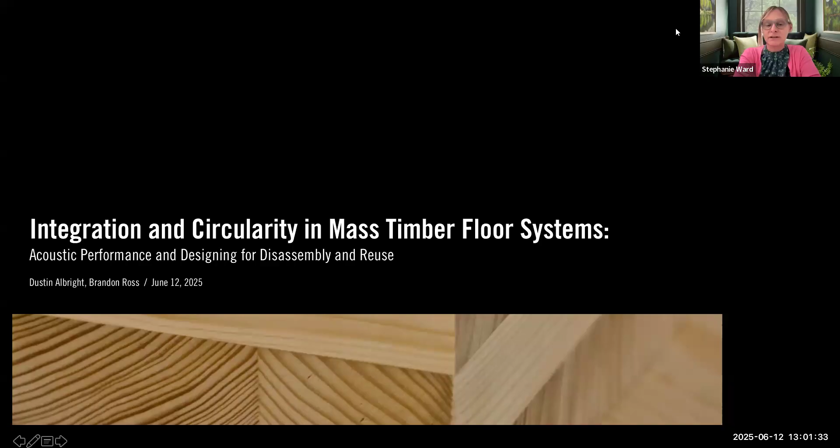Hi everyone, my name is Dustin Albright. It's great to be part of this webinar series. I too am a procrastinator, so I resonate with this group. I'm joined today by my colleague Brandon Ross, and we're going to talk about mass timber, floor systems, and acoustics.

For those I maybe haven't met, I'm a practicing architect here in South Carolina. I work in the Clemson office of Hanbury, and I'm also full-time an associate professor in the School of Architecture at Clemson. Brandon, my colleague, is a professor in the Department of Civil Engineering here at Clemson. Anything else you want to say by way of introduction, Brandon?

Sometimes I look a little more stylish so I can pretend I'm an architect. There you go, perfect, there you go.

Together we are part of the Wood Utilization and Design Institute at Clemson. This is a cross-disciplinary group of people that collaborate on research and teaching. You see several participants and contributors from forestry, civil engineering, architecture, environmental engineering, and chemistry. It's a great team and a highly collaborative setting, so really rewarding to be part of this group. The project we're going to share has been connected to the Wood Institute since we were awarded the project from the Department of Energy.

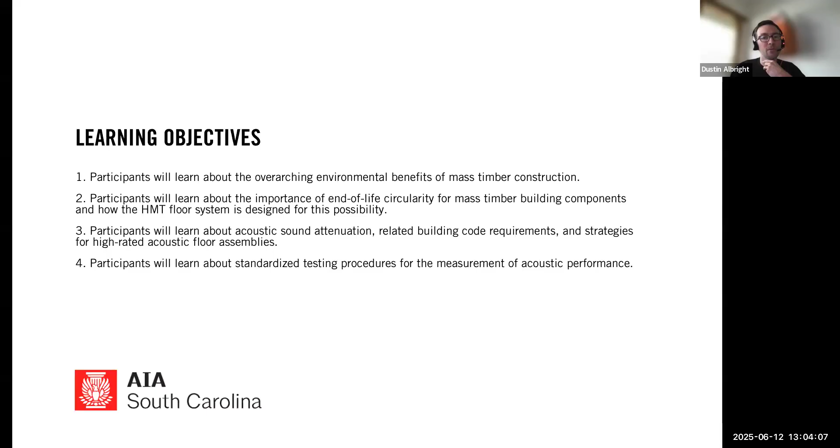Brandon, I'm going to turn it over to you to describe an overview of the project for the next few slides, and you let me know when you want me to advance the slide. Sure. We took an existing idea and formed a team, as Dustin mentioned. We have myself, a structural engineer, a couple of my civil engineering colleagues, Dustin, an architect, and we also have Dr. Pat Layton, a forester on the team, as well as an environmental engineer to do some of the LCA.

I always get this question: why is the Department of Energy interested in funding the development of a wood floor system? Mostly I get that question from other people who do work with the Department of Energy.

One of the missions of Department of Energy is to reduce atmospheric carbon, and that's where this program was birthed. It's Department of Energy, then ARPA-E, and under that is HESTIA. That's a program with projects that last about three years, about $45 million total, not just for Clemson but spread across many projects. The idea is, rather than building materials that require carbon to go into the atmosphere, let's turn that on its head and invest in research in building materials that sequester carbon. There's a really old technology that does that very well called trees, and that's where our project came along. There are other folks looking at insulation or negative carbon cements they're even trying. Lots of different things there.

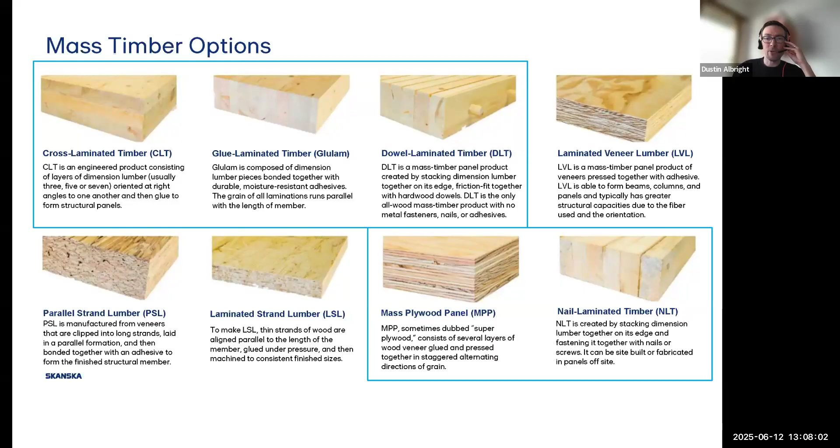In terms of the panelized products, the ones in the blue boxes here are the ones most typically used and available in North America. That's cross-laminated timber, CLT, and glulam, which can be panelized, though glulam is often used for beams, girders, and columns as linear framing members too. There's also dowel laminated timber, nail laminated timber in the bottom right, and mass plywood, which is plywood sheets laminated together. One product not represented here, new on the scene, is veneer laminated timber, VLT, produced by a company called Boise Cascade.

Some of the motivating factors and advantages of working with mass timber: on one hand, there's robust and resilient construction with a renewable natural resource, wood. Mass timber construction supports state and regional forest economies. It affords a very low carbon footprint compared to steel and especially concrete, and there's also the opportunity for carbon storage, which we'll talk about in a moment.

There's rapid construction with precise prefabricated elements, as with other prefabricated systems, and a high strength to weight ratio - wood is really strong with respect to its own weight. The net result is lighter weight buildings that can result in lighter foundation systems. The ability to expose the structure as a finished material is really appealing and can cut out the need for other finishes, like ceiling finishes, saving on construction costs and time.

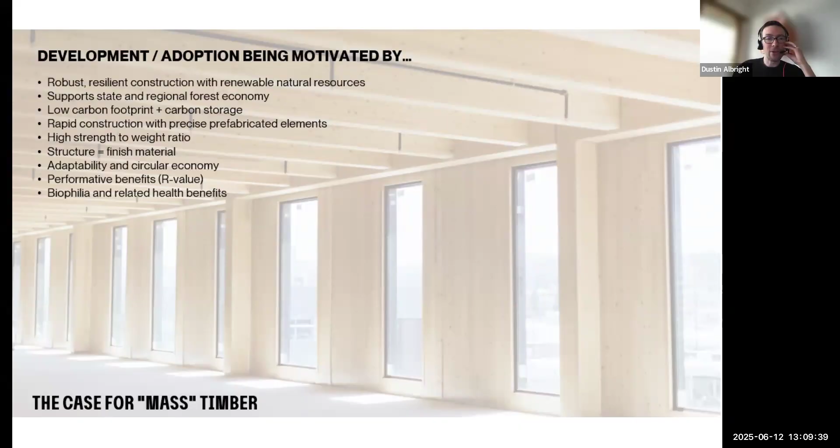Adaptability and circularity of the components is something we're going to talk a lot about. There are also performative benefits: the inherent R value with timber, biophilia, and other health-related benefits. I don't have time to get into that, but there's a lot of research out there on it.

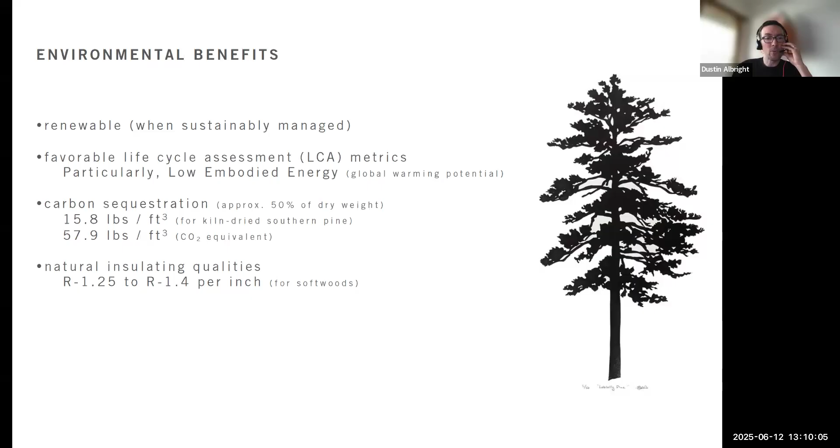Let's talk about the environmental benefits briefly. These include the renewability of timber when sustainably managed, favorable life cycle assessment metrics - in particular low embodied energy - the fact that wood sequesters carbon, which we'll talk about in a moment, and its natural insulating quality: an R value somewhere between 1.25 and 1.4 per inch just for softwoods, before you even add other insulating materials.

Wood as a commodity, as a resource, is renewable, provided it is sustainably managed through best practices and sustainable forest management. There are various organizations and agencies you're probably aware of, like the Forest Stewardship Council, SFI, and others that certify the sustainable management of forests and forest lands.

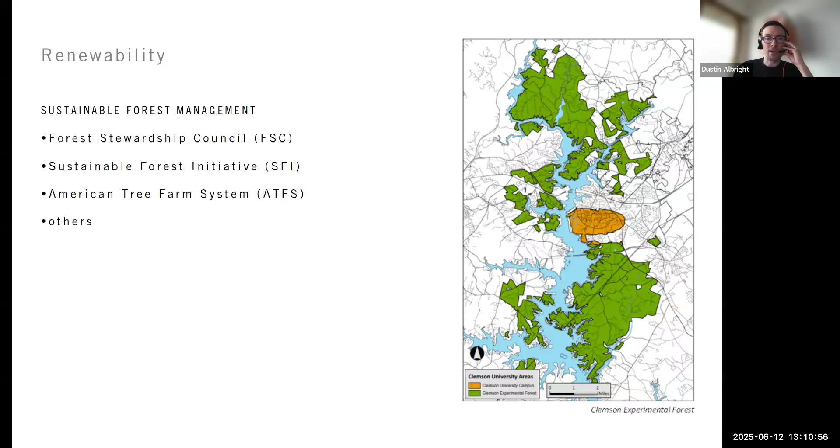Something you may not know: pictured here in orange in the middle of this graphic is Clemson University's campus. But in green, to the north and south of the campus, is 17,500 acres that Clemson University owns and maintains as forest land - we call it the Experimental Forest, Clemson Experimental Forest. All of that property is certified through the SFI Sustainable Forest Initiative system as sustainably managed.

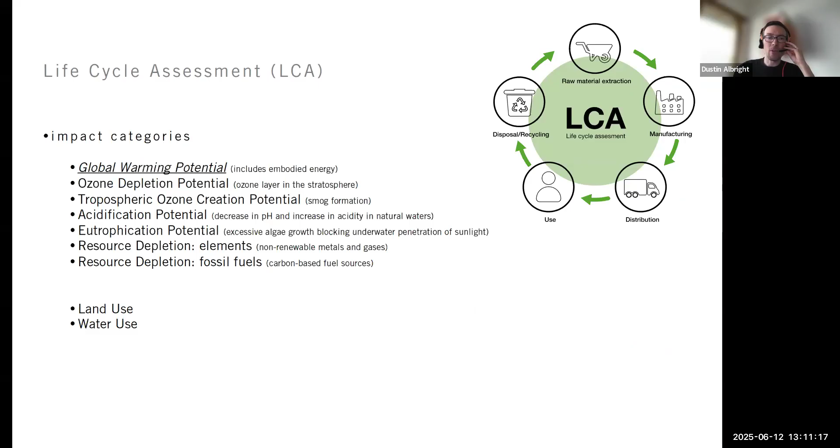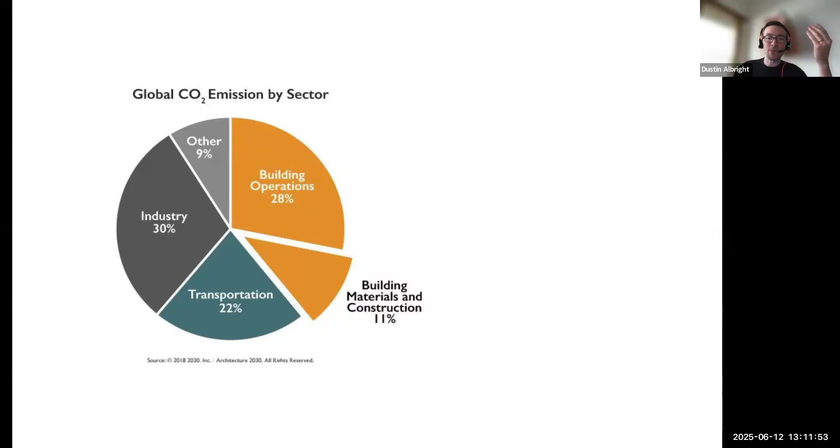So that's a really significant percentage, 11%. And so the majority of that embodied carbon comes into play in the building's foundation and structure.

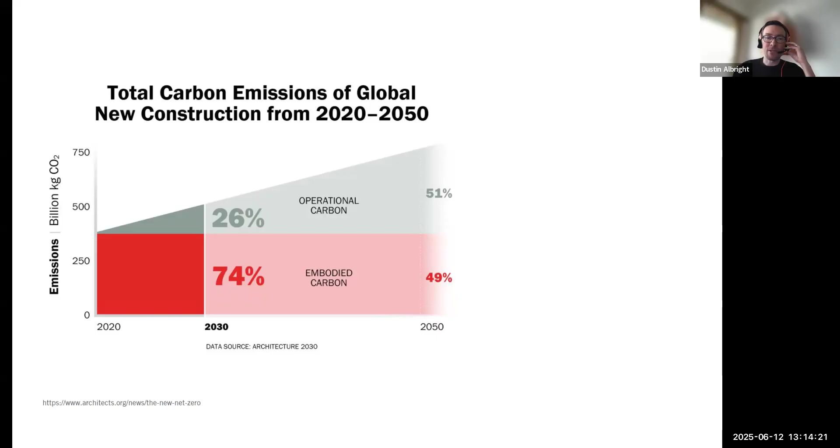And so within our community, there's been a lot of movement on looking at embodied carbon. This graphic really speaks to that - there were all of these strides for the last two or three decades on more and more energy efficient lighting and systems, all the things that relate to reductions in operational carbon. And as our buildings have become more efficient in those areas, it means that a greater percentage of the overall carbon footprint is associated with embodied carbon.

And so as we think about embodied carbon, certainly the thing that makes the most sense is it's the carbon that comes into play through the harvesting of raw materials, the production of products that go into our buildings, the shipping, the construction, et cetera - everything to get you up to the point of occupation.

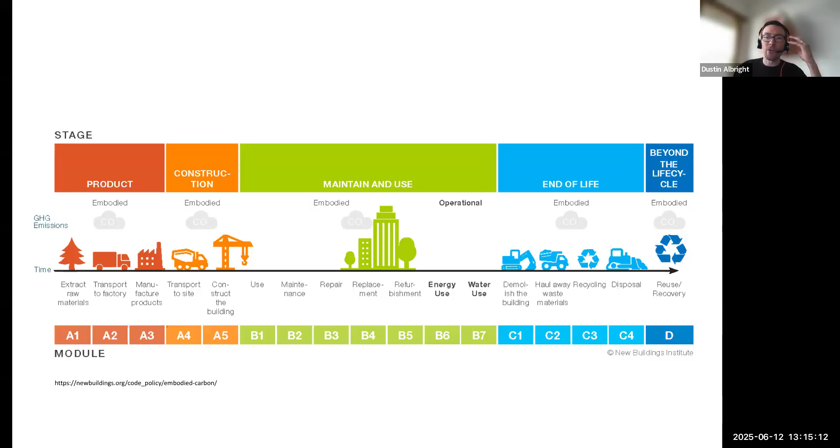But there are these other areas of embodied carbon, like maintenance and repair - that's considered to be embodied. It's not a part of operational energy use, it's related to the building materials themselves. And importantly, the end of life: once the building has reached the end of its service life, or once it's experiencing a substantial renovation, what happens to the building systems, the structure in those cases? That's something that's really integral and important for our particular project.

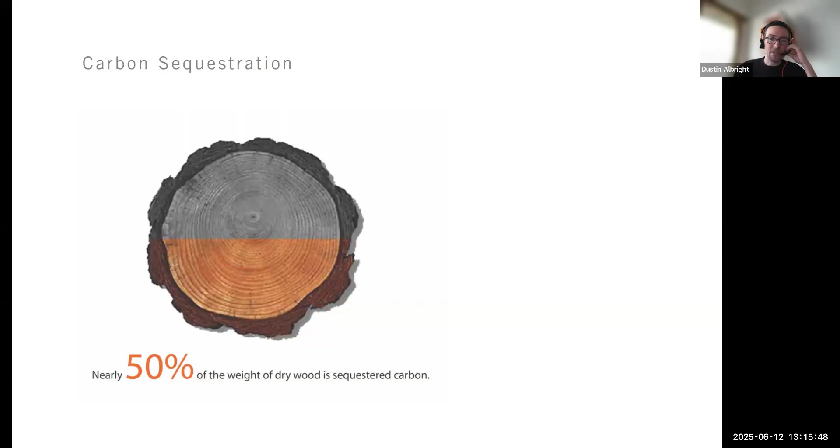One thing I've mentioned in passing before, but it's important to remember, is that wood, as it grows - as trees grow, as any vegetative material grows - it's fed by the soil, UV light and water, but also by the atmosphere. It takes in carbon dioxide, CO2, from the atmosphere. About 50% of the dry weight of wood is actually sequestered carbon. Trees breathe in CO2, store the carbon, and release breathable O2 into the atmosphere, as we all learned about photosynthesis in school.

They provide professional input and guidance to design teams, with lots of resources available - white papers, case studies. But through their work, and through the evolving building codes and everything else, you can see this rapid rate of adoption. While mass timber got a head start in Europe, the speed and scale of adoption is really impressive in the United States.

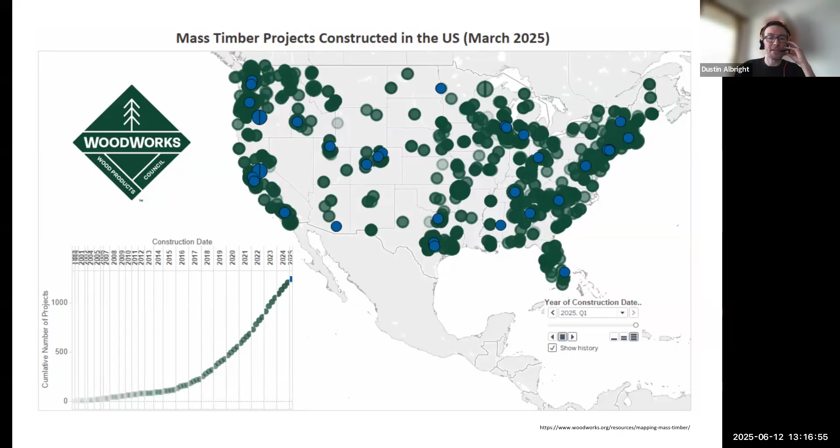Okay, so this brings us to our project, and I'm going to talk through the premise of this as we move along.

This form of construction, depending on the construction type, if the steel requires a fire rating, then you're often using a fiber cement spray on it. That means you're looking at drop ceilings and other systems to cover over the steel and the MEP systems. So you're talking about a lot of complexity and a lot of embodied carbon in the materials.

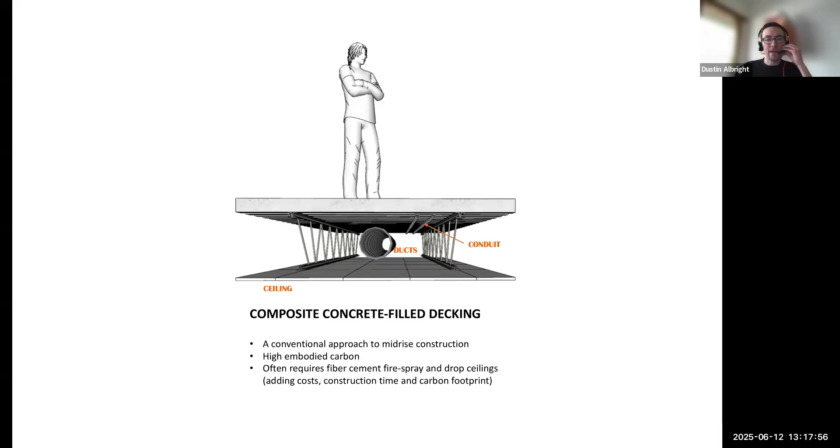In that scenario, as in most every application of mass timber, you're required very often to have a concrete topping layer. And that concrete topping layer is helpful for acoustics and vibration control. We're going to come back to that in a moment.

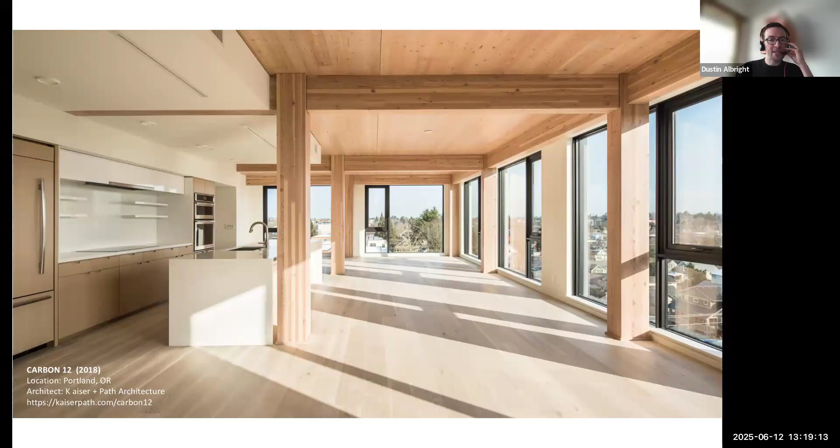This is a project that was completed in 2018 in Portland, Oregon by Kaiser + Path Architecture. It's called the Carbon 12 building. It's a residential building, all timber construction, except there's a steel framed braced frame core.

Hold on, hold on one second. Thanks, sorry, I'm in the office, so hopefully you all can hear me without too much trouble here.

So what I'm showing is two options for the ceiling. On the right-hand side is what we showed in the last slide, where all that timber is exposed. In this case, the architects working with the engineering team were able to cluster and aggregate the MEP systems into the drop ceiling area, into this bulkhead over the kitchen. So that shows both approaches right there in one slide.

Another approach to systems integration is through the use of a raised access floor system. You may be familiar with raised access floors, maybe you've worked on projects involving these. This gives you the ability to expose all of the timber underneath. You may have an automatic sprinkler system exposed underneath, but other than that, the mechanical ducts and whatnot could be included in the raised access floor, maybe as a pressurized plenum up there. This is great for visual clarity and integration.

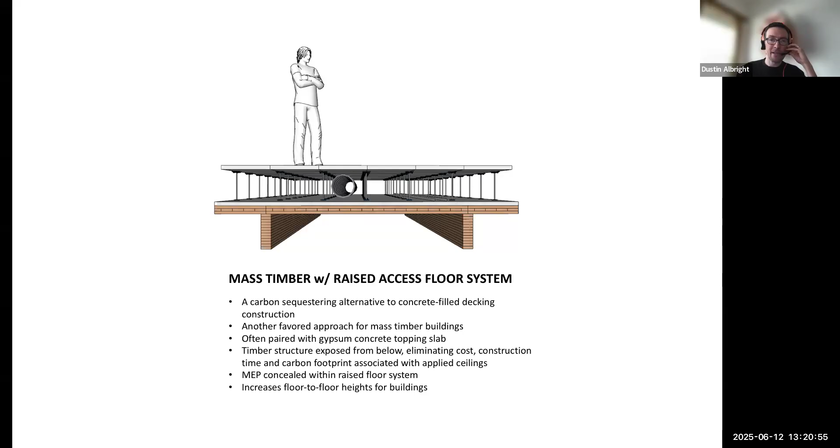This does still often require the use of a concrete topping, again for acoustic and vibration control, which we'll get to. This increases the floor-to-floor height for buildings, so there are various trade-offs associated with this, but it presents a great option for systems integration.

This is a project completed in 2019 in San Antonio, Texas, designed by Lake Flato with Boka Powell Architects as the local architect. The timber was produced by a company called Structurecraft. This is a raised access floor system before the finished floor went on to it. They were able to use a 20 by 30 grid.

This uses not cross-laminated timber panels, but dowel laminated timber panels over a glue lam frame. They're able to achieve a little bit of a longer span, a 20-foot span, than you would typically get with mass timber. With CLT you're typically limited with a 5-ply system to somewhere between 15 and 18 feet, depending on live load, use case, and occupancy. Here they were able to get up to 20 feet because dowel laminated timber is a little more structurally efficient, but still limited to 20 feet.

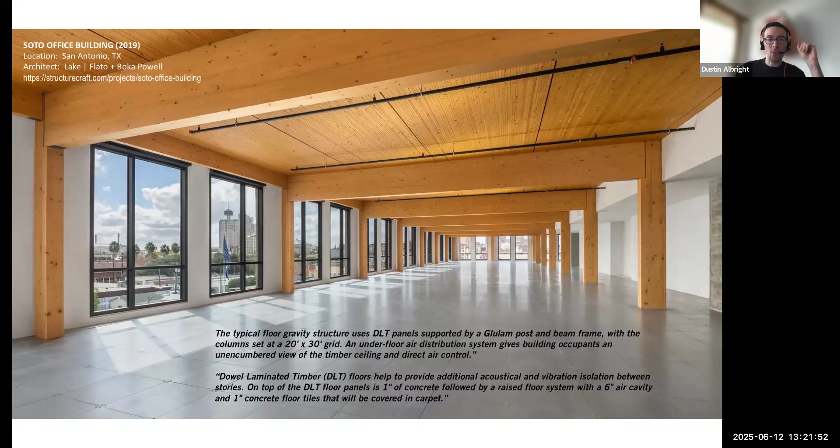So hold that in your mind as we talk about our system. What we've thought about and have been working on at Clemson for a number of years, and is the subject of this current project, is a hollow mass timber, HMT, floor cassette.

This is built up with a 3-ply CLT flange on top and a 3-ply flange on the bottom, with glue laminated timber beams sandwiched in between. This makes a kind of hollow cassette.

We see this as functioning in a similar way to a raised access floor, if you can provide access hatches at duct junctions and other points of interest in the system. This does increase floor-to-floor heights, but it provides a lot of the same functionality as a raised access floor.

You see that there is the ability to expose the underside of the timber totally without worrying about the visibility of the other systems.

And then we have as a goal, with this robust, massive system with all this timber and the void space, the possibility of eliminating the gypsum concrete topping layer to better enable disassembly and reuse.

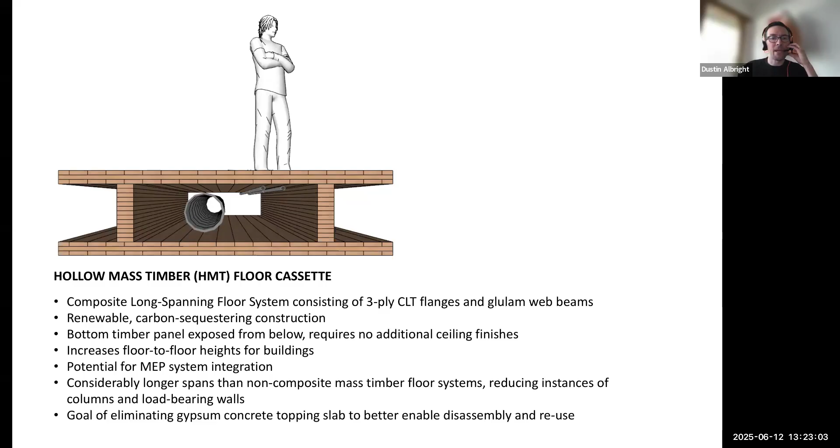Because as soon as that concrete topping layer is applied, it means that it's married to the timber underneath it. So when you come to the end of the life cycle of the building or its components, you're not able to take apart the floor system and reuse the CLT panels or the glue lam.

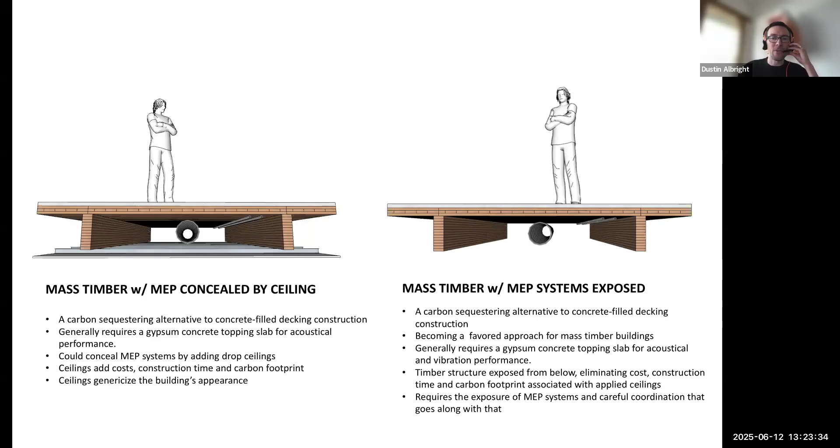That's a missed opportunity, because with these prefabricated panels, if you think about a kind of circular economy, that would really add to the overall life cycle performance of these systems.

Hollow mass timber floor cassettes have been the subject of study at Clemson since 2013. It was first studied at that time by a team including Graham Montgomery, one of our master's students. At that point they were focused on the connection behavior between the flange and web connections, with some digital simulation models.

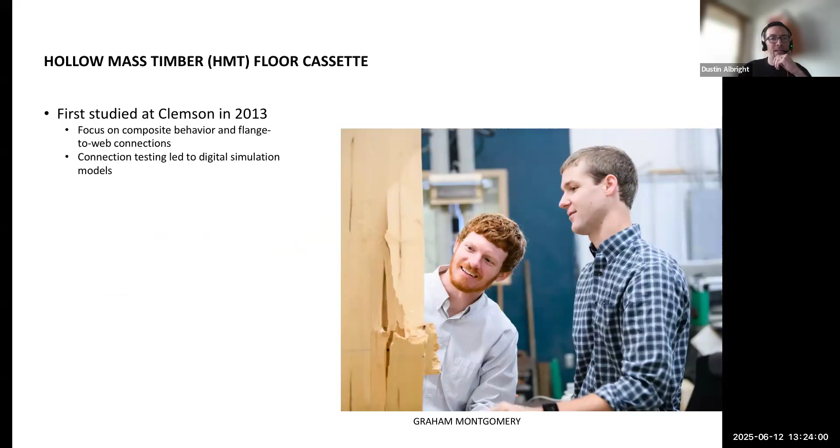In 2017, the first full-scale test was performed, testing for a 40-foot span. This was initially conceived as a long-span built-up timber system. You saw in one of the previous examples a span of 20 feet, so we're doubling that with this system.

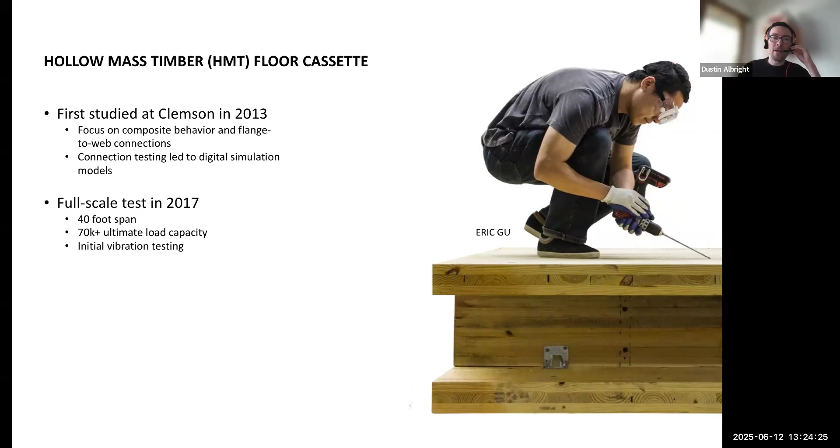Through the testing performed in 2017, we were convinced that a 40-foot span is viable. There was some initial vibration testing as well at that time.

Okay, Brandon, back to you for the next few slides, bringing us back to our current project. Yeah, absolutely. As soon as we saw the call from ARPA-E for this Hestia program, we thought, let's bring the hollow timber cassette back and see if we can go beyond just strength tests and vibration tests, but think about how it might integrate into a building.

And then perform all of the different structural tests, trying to optimize the structural connections. You can see here we looked at cutting some holes in it so that you could access the different panels in order to run your HVAC, plumbing, and electrical through it.

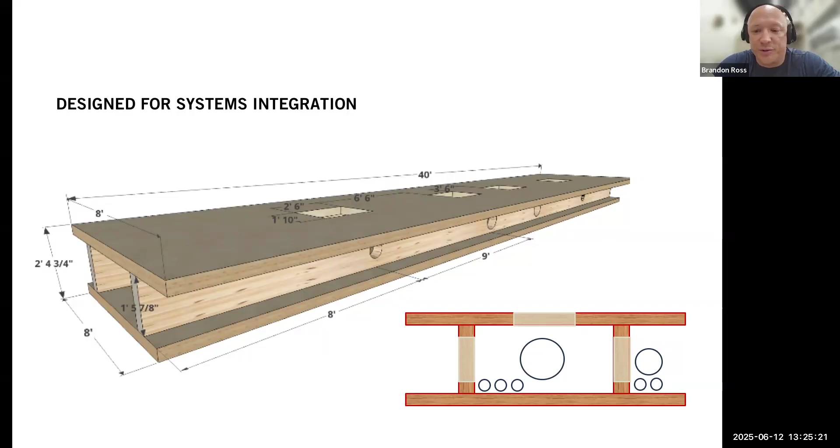We stuck with the same 40-foot span. A big aspect of this, partly because of our interest here at Clemson but also because of the sponsor, was to look at deconstruction.

Dustin did a very good job explaining why the concrete toppings are a problem for that. So we've been thinking about this at different levels: the components, which are the individual CLTs and glue lams, the assemblies where they're all put together into the cassette, a structural bay, and finally the whole office building.

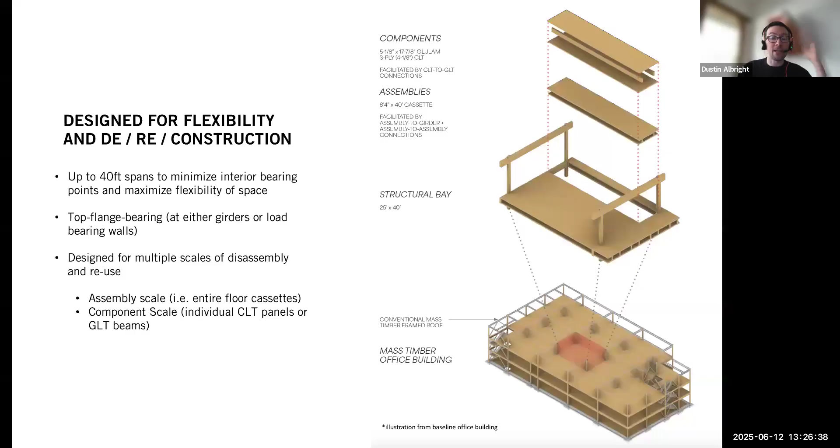And so, Brandon, these areas of study have been a part of our project as well. Yeah, and being able to take stuff apart at the end, little things like, do we use adhesives? Do we use screws? If you use screws, you're going to be able to reverse them at the end. So these are all some of the structural considerations we did, as well as vibration, which ends up being the controlling factor for these more so than strength.

After we get done with these tests, we take them apart. Can you actually deconstruct them? What condition are they in? System integration we've talked about. Dustin's going to spend most of the time talking about acoustic performance here next.

And then especially looking at the life cycle assessment, I'll reiterate a point Dustin mentioned earlier: the end of life for these. If you grind one of these up and use it as mulch in your yard, that's great, it's being reused, but all of that carbon that was in that wood is eventually going to go back to the atmosphere. So it's nice that it was delayed, but really to lock in those benefits, you want to keep these timber components as buildings for as long as possible.

We've been looking at cost analysis, and then probably a lot of y'all are very interested in the code analysis, and Dustin will hit on that here as well.

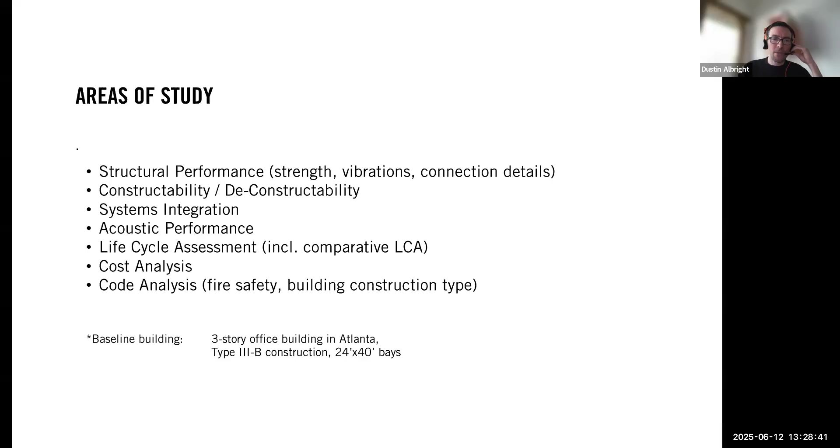Okay, moving ahead, getting into the code of all this. Mass timber is how this relates to the IBC. Mass timber is accepted for use predominantly within type 3, type 4, and type 5 construction. Types 1 and 2 are non-combustible. You can actually use mass timber for roofs within type 2 construction, but predominantly mass timber is confined to types 3, 4, and 5. And in the 2021 building code, type 4 construction greatly expanded.

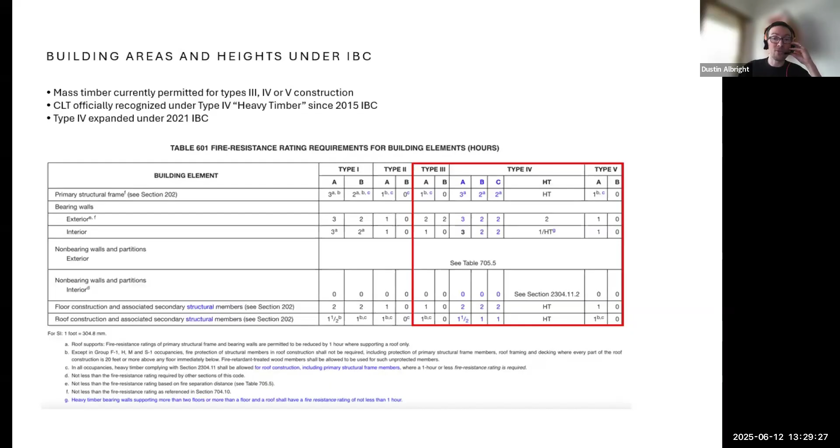So now we can build taller and bigger buildings with mass timber, depending on the extent to which the mass timber is encapsulated or otherwise fire protected. It can be totally exposed in the case of type 4 heavy timber or type 3 construction. And you can see some of those details here taken from the IBC.

You may be interested in, and may have bumped into this if you've worked with mass timber or other wood frame timber structures, the topic of concealed spaces. It used to be that concealed spaces were pretty much prohibited in the IBC when it came to type 4 heavy timber construction. But now in the 2021 building code, concealed spaces, whether plenum spaces or chases or whatnot, are permitted within types 3 and 4, types 3 and 5 construction.

The presence of the heavy timber itself isn't sufficient as a fire stopping measure, and they're permitted within type 4C and type 4 HT in the 2021 IBC, provided these fire stopping measures are met. So for HT, you could sprinkler the cavity, which isn't always practical. You could fill the cavity with a non-combustible insulation, or, acceptable for both type 4C and type 4 HT, is encapsulation with a layer of type X gypsum board.

If you were ever to go to a type 4A or B, those are real big buildings, then you'd be required to use 2 layers of type X gypsum board in the concealed space. For our study, we focused on type 3, and there's a lot of construction across the country with mass timber that falls into type 3 construction. Now, as you're familiar with the code, that prohibits the use of combustible materials in exterior walls, but because many of the buildings are post and beam framing, that's not an issue -- you have non-combustible construction for the walls anyway.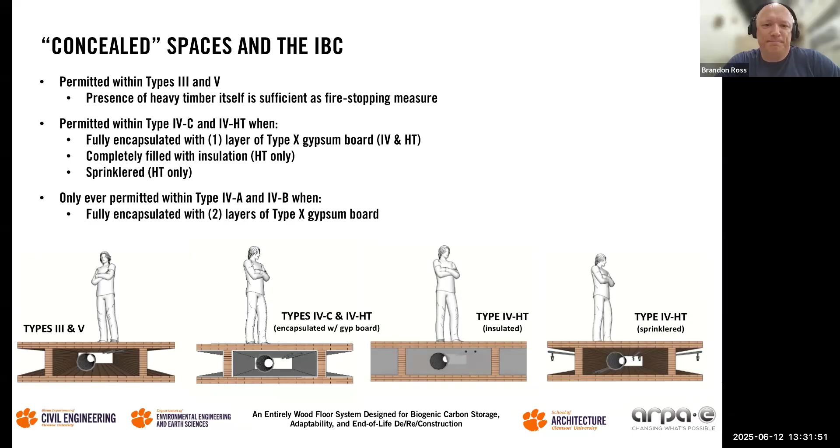Fantastic. Okay, so we'll turn our attention then to the building acoustics and the acoustic performance.

Acoustic performance in buildings really falls into two categories: one is airborne sound, and the other is structure-borne or impact sound. Some of this you may be familiar with, some of it may be new to you.

The airborne sound is typically classified with a rating called STC, or sound transmission class rating, measured through a standardized test in a laboratory setting.

The IBC in Chapter 12 specifies that dwelling units and sleeping units have to achieve an STC rating of 50 or higher, which is the most stringent case prescribed by the IBC. It's not easy to achieve that, and anybody on the call that's worked with multifamily construction knows that's a challenge.

For structure-borne sound, it's measured typically through IIC, impact insulation class, which again is based on a laboratory test, and you're required to achieve a rating of 50 or higher for the same use cases.

For both cases, it's worth noting that the IBC permits ratings of 45 or higher when field tested. There's a separate set of ASTM test standards for field testing. Rather than being classified as STC, the airborne sound isolation is called NNIC, Normalized Noise Isolation Class, and you have to achieve a rating of 45 or higher. For impact sound, it's NISR, again with a rating of 45 or higher.

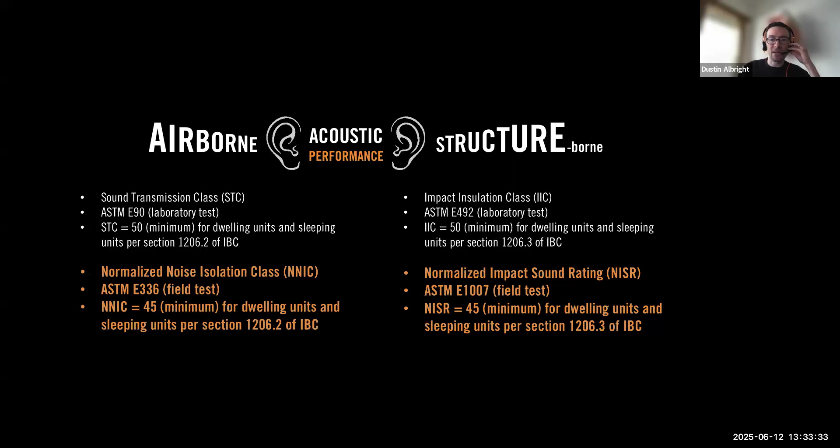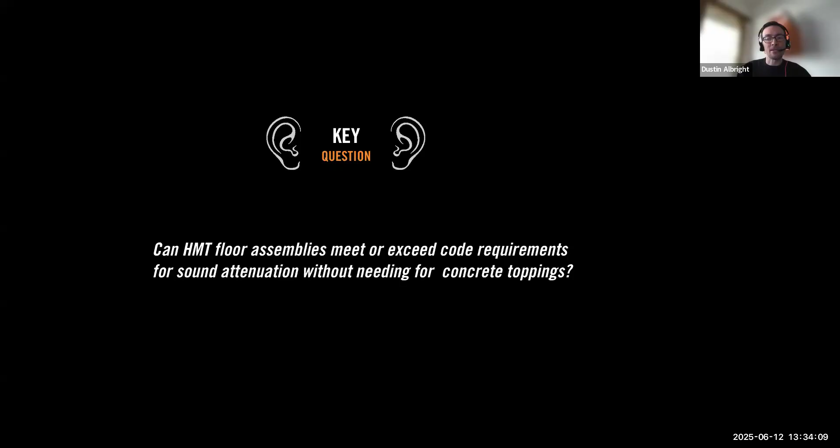So our key driving question for the acoustics piece of this project is: can our unique HMT floor assemblies, whether a bare assembly or one with carpet and other finishes applied, meet or exceed code requirements for sound attenuation without needing concrete toppings? This would reduce the carbon footprint of the floor assembly and also enable future disassembly and reuse of the components in a circular economic scenario.

So how is sound measured and studied, whether it's a field test or a laboratory test? For airborne sound and structure-borne sound, you're testing floor assemblies within a two-story test scenario. In a laboratory setting, it's a test chamber; in a field study, it's one apartment above another.

The upper room is called the source room, where you're generating the sound, so that's where the sound source is. Then in the room below, that's the receiving room, where you're measuring the sound transmission.

For airborne sound, you're producing a pretty high decibel level, called pink noise, with an amplifier like you see here and a dodecahedron speaker. It's a non-directional, kind of omnidirectional noise.

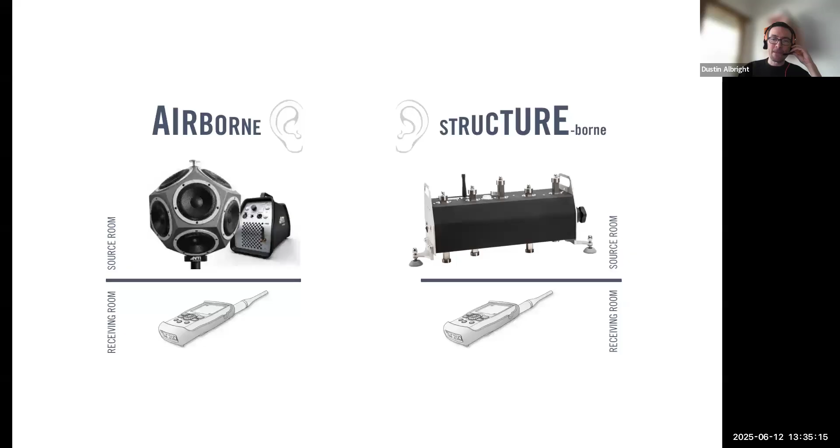For impact sound, you're using a standardized tapping machine like you see here, which has pistons that go up and down with hammers on the bottom. It applies tapping on the floor at a prescribed and standardized frequency and force, and again you're measuring down in the receiving room.

Oftentimes this is done in industry through third-party testing labs. This is a lab that belongs to Maxxon, a company that makes, ironically, gypsum concrete toppings as well as acoustic membrane layers. We thought about taking our system for this project and sending it off to a testing lab to test and see what our performance is.

But we knew we were going to be doing a lot of iterative testing, adding different layers of flooring to see what the effect is, so we wanted a lot of control over that and flexibility. We also wanted to make an investment into our laboratory, into our students, and our capacity here at Clemson.

So we decided that we would design, build, and operate a two-story test chamber here. You see a graphic showing our two bays of our structural lab, what we call our built environment lab. We designed this chamber so it could break into two halves.

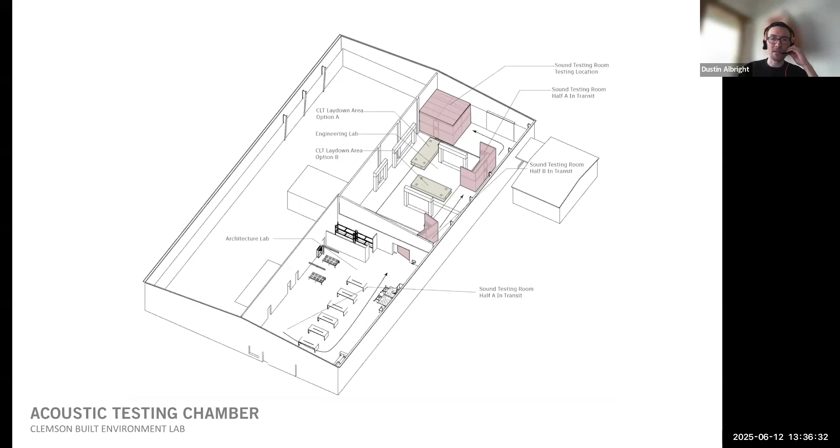The upper walls are hinged and can collapse down, so we can move the parts of this chamber between our low bay space and our high bay space. The low bay space is shown toward the bottom of this image, and the high bay space is shown here with the two-story chamber resting in the corner of it.

This provided a number of opportunities for us. One is it was a great opportunity for us to really get to know intimately all of the details of the testing for ourselves. It allowed us to invest in a kind of acoustic testing infrastructure that means we can go out and pursue other grants and partnerships beyond this project.

It also meant that we could turn this into a teaching tool. Lots of students were able to participate in the design and in particular the construction of the sound chambers, learning about light frame construction, double stud walls, and high performing acoustically performing wall, floor, and roof assemblies. And so this whole thing came together, and here you see it in its place with our rolling gantry crane above.

We have the lid, all the walls, and the permanent floor system are all really robust, acoustically dense. We used layers of sheetrock and homosote over resilient channels. The idea is to prevent sound from coming in or going out through the walls and other permanent construction. You really want to isolate the sound movement to the floor specimen you're working with.

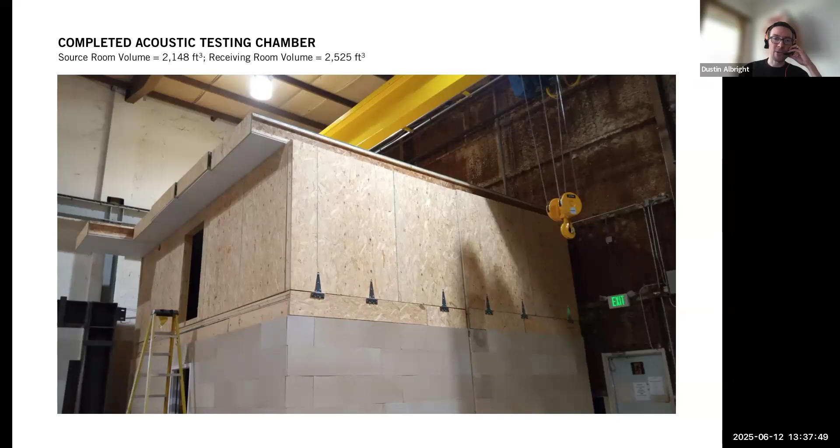If I go back for a moment, you see here this big hole cut in the floor - that's where the experimental floor assembly would be put into place. You can see all this robust concrete construction all around. The idea is that any sound generated in the source room is only able to go through the tested assembly into the receiving room.

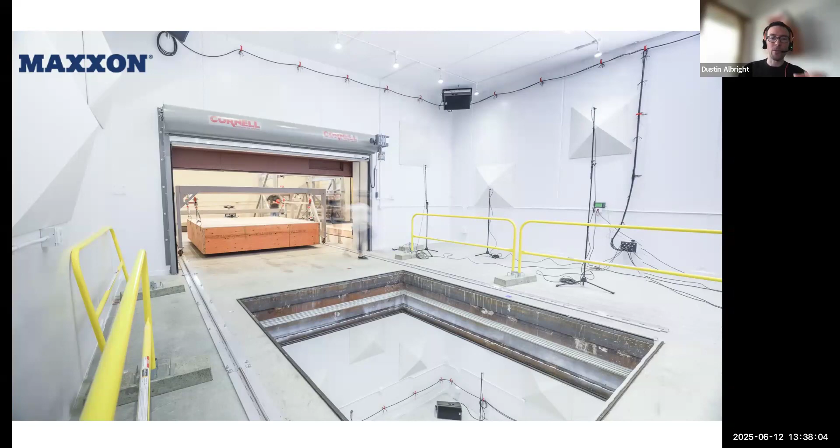Just a quick couple of notes about how you test this. The first thing you do is go into the receiving room and take a first set of baseline measurements, measuring background noise and interference - noise from the ambient environment. You do that so you can zero that out, taking it out of the measurements that are later recorded.

The next thing you do in the receiving room is blast some sound. You may do this as well in the source room, but basically you blast sound and measure the decay rate - how long it takes for the sound to actually decay out. This factors into the calculations and the whole process of coming up with these ratings.

The next thing you do for airborne sound is go up into the source room and measure the decibel level of the sound there, at various locations with various speaker locations for all of this. Then you go downstairs and measure how much sound is coming through the system downstairs. The net difference is the sound transmitted between the source room and the receiving room for airborne sound.

For the tapping sound, you don't have to take any measurements up in the source room. You just take measurements in the receiving room because the force of that impact is applied directly to the floor specimen. Since it's a standardized tapping machine, there aren't any preliminary measurements required - you're only measuring at various spots downstairs how much sound is coming through in terms of the impact sound.

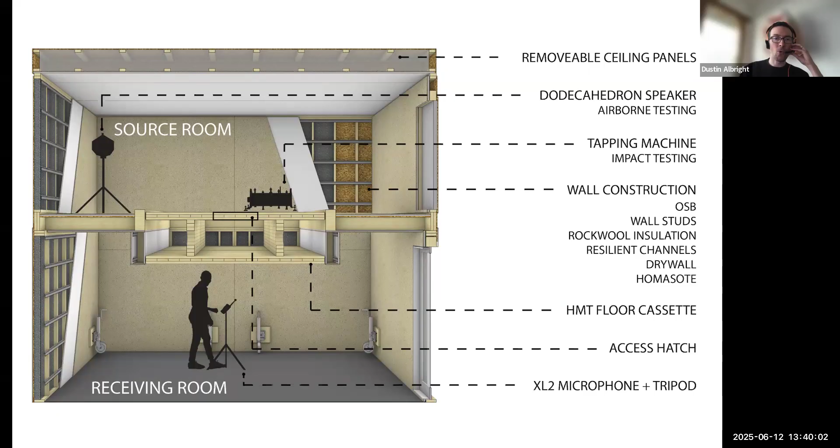The first thing we had to do to make sure we were on the right path is use some kind of control floor assemblies to test and measure against expected data, published data, available data compiled by professional laboratories and other researchers, to make sure our setup and procedure were yielding results that are to be expected. Once we could validate through that process, we were ready to move on to our own experimental floor system and related testing.

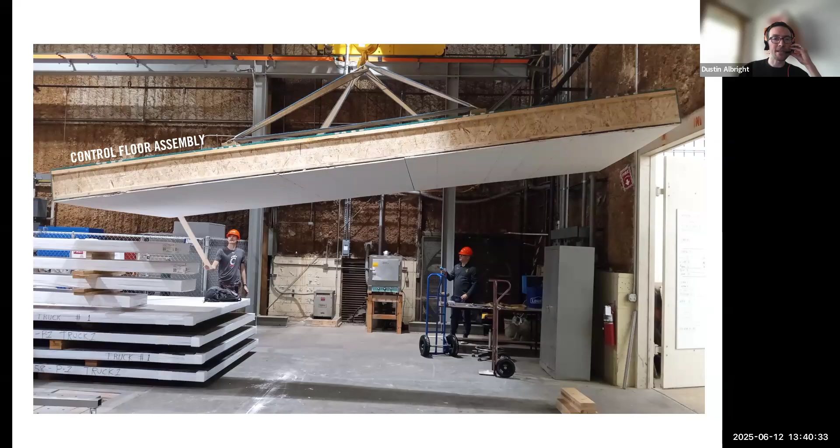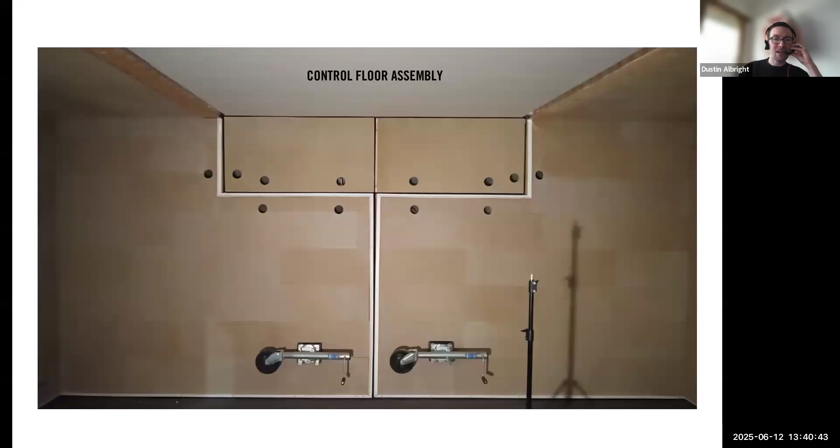This is one of the control floor assemblies, using I-joist construction. You see that going into place here, the top walls that fold down in the whole chamber, and then from inside the receiving room below with that control floor above.

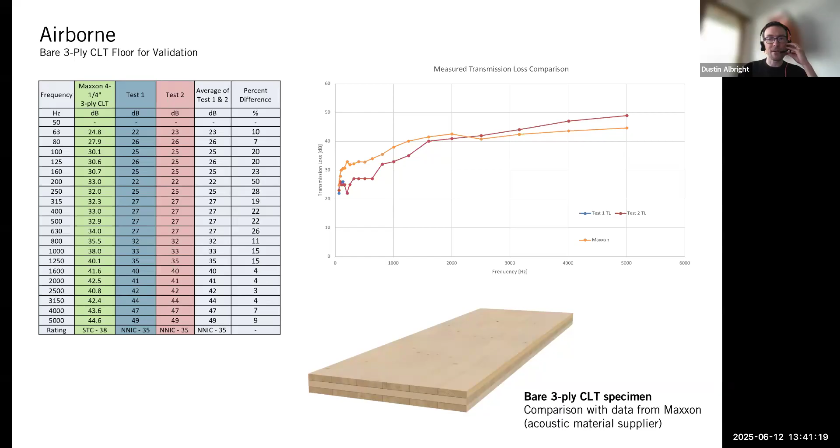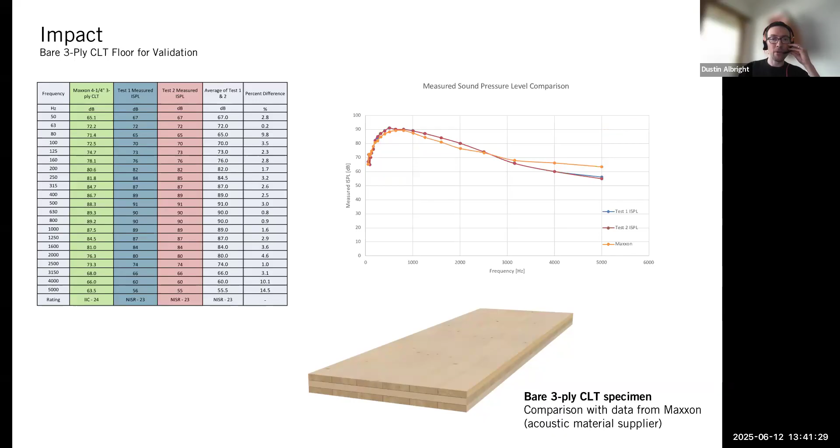And we were satisfied that the airborne data, and by the way, the decibel levels for sound transmission are measured across a range of audible frequencies, and then all of that is averaged into the overall ratings. So long story short, we demonstrated consistent data with what Maxxon had done in their professional lab, so we felt like we were ready to move forward. We felt like we had validated the system.

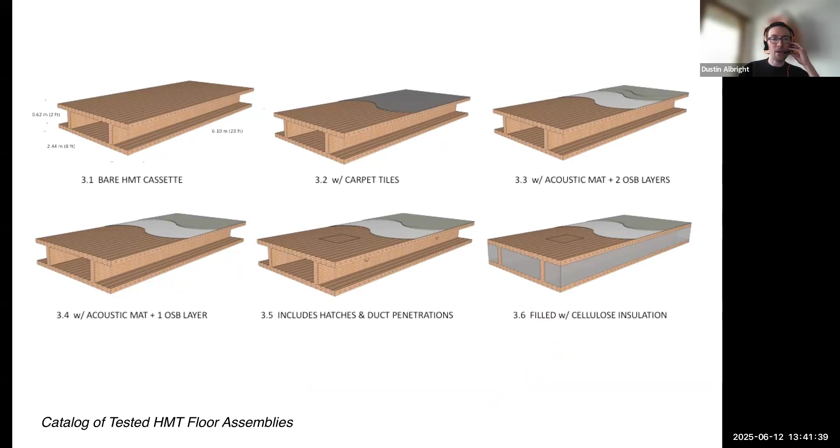Ultimately, these were the variations of our hollow mass timber system that we tested. We tested the bare assembly first, at a length of about close to 20 feet. While we're interested in the structural capacity and span of 40 feet for this acoustic testing, we shortened it down based on the footprint and volume of our acoustic testing chamber. We worked with a 20-foot span, 8-foot width.

I should note that throughout all of this, we actually used the field test standards and measurements rather than the laboratory-based measurements from ASTM. That was based on the advice of several professional acousticians we reached out to. We just weren't able to build a sound chamber with a big enough volume to technically meet the requirements of the lab testing for the STC or IIC rating. So we went instead with the field test measures.

So here you see that bare assembly being craned into place, and then you see a view on the right from the source room and then downstairs in the receiving room.

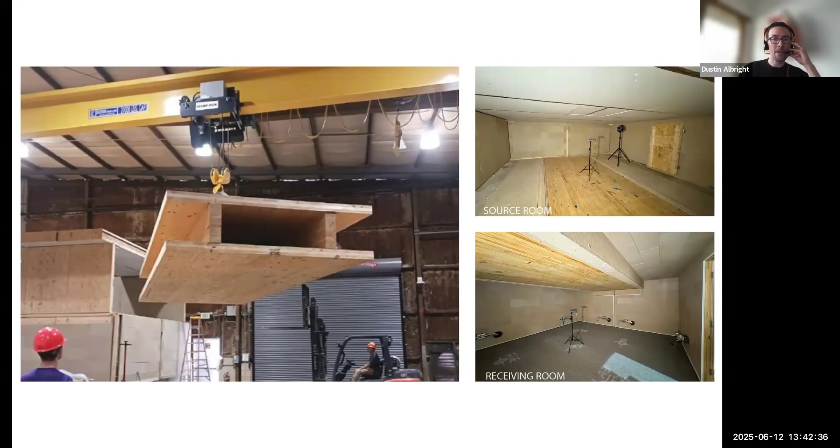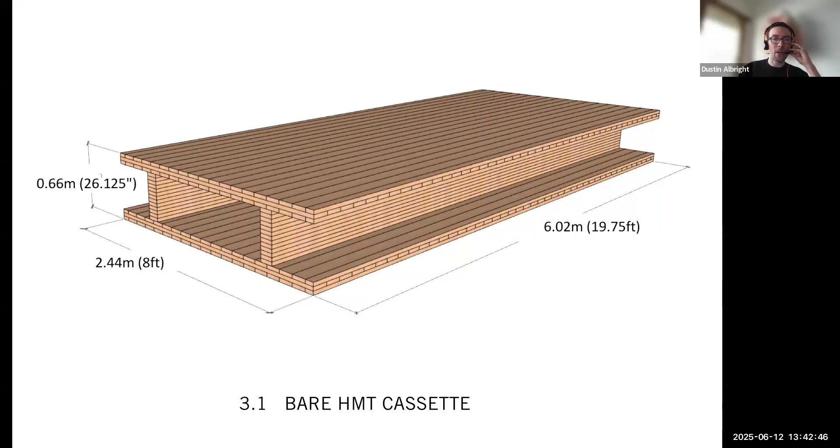The next assembly that we tested after that - we did this bare assembly just to get a sense of the baseline, what kinds of ratings you'd get just with the system right out of the box. Next, as we added carpet tiles, interestingly enough, the carpet tiles came from a company called Interface, and it featured a carbon negative backing, which is really great.

After the carpet tiles, we took all the carpet tiles off and then used an acoustic mat from Maxxon, plus 2 layers of 3/4-inch OSB subfloor. The acoustic mat, just like with the carpet, serves to decouple the impact sound from the structural substrate of the mass timbers. That's really important for impact sound mitigation.

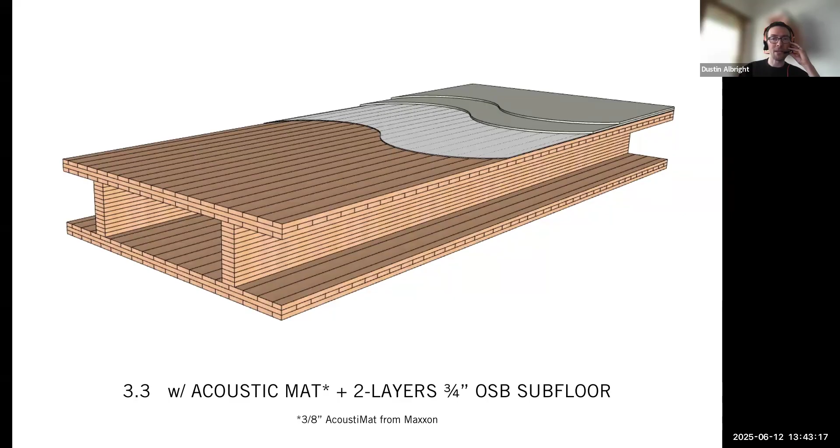After that, the next specimen we tested is two layers of OSB subfloor over the acoustic mat. For each of these tested assemblies, we ran two tests and then averaged the results.

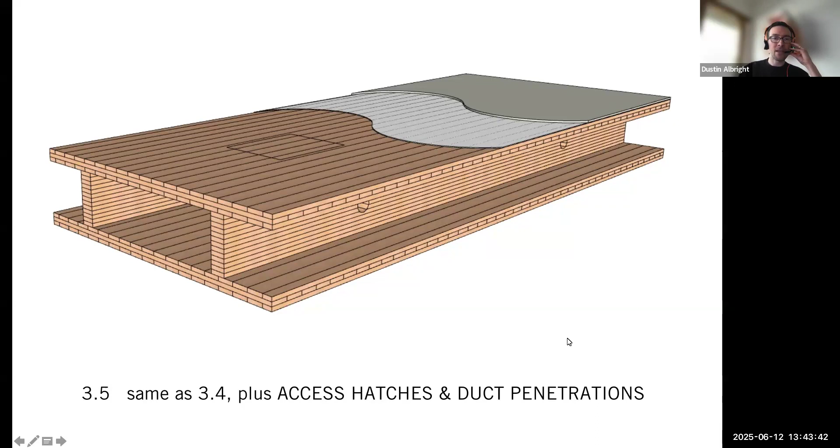Next, we kept the same general system with the acoustic mat and the OSB, but we cut in the access hatches as well as the duct penetration holes. Then finally, we kept all of that, but added a blow-in cellulose insulation, which is non-combustible. It has some properties that help, potentially, with acoustic sound attenuation, but it's also one of those fire-stopping measures acceptable for Type 4 HT construction. So we were interested in that synergy.

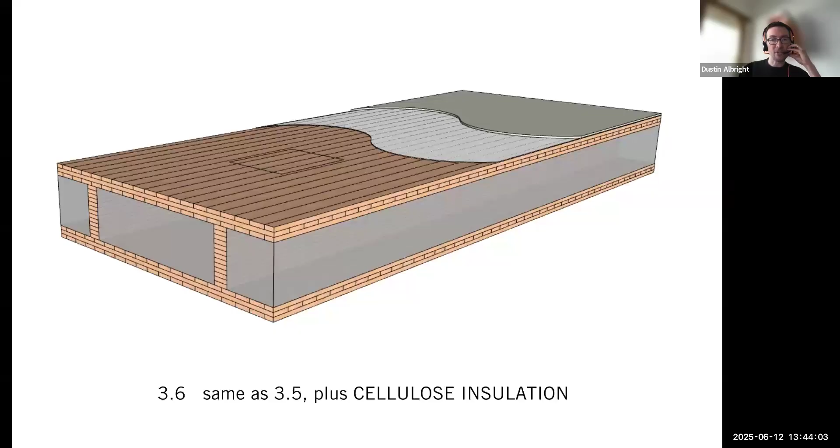So just to summarize the results here and bring us in for a landing, here you see the overall results for airborne sound transmission. Right out of the gate, the bare assembly provided an airborne sound rating of 45, which met our requirement. And then the other assemblies only added to that.

Yep. Could you just remind me - probably for everybody else, I'll ask the question - I know one of these you want to be lower and one of them you want to be higher on these graphs. So if you could just orient me a little bit. Thank you.

So the airborne sound is classified based on transmission loss, and that's the net - it's the decibel level measured up in the source room, and then you subtract out the decibel level measured down in the receiving room, so the loss is reflective of how much is transmitted. So you want the sound transmission loss to be high.

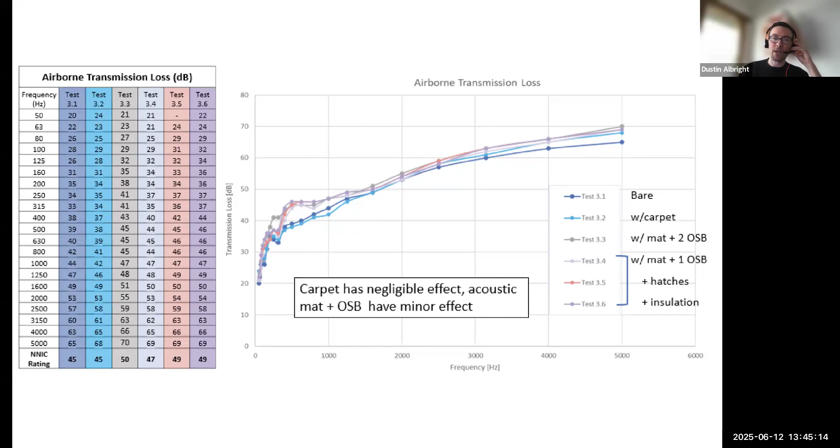Okay, so all of that then is averaged into the NNIC ratings that you see at the bottom of that table there. I'll have a summary table in just a minute.

Okay, now here's the impact sound. There's one outlier, and I bet you could guess which one it is: the bare assembly. For that bare assembly, naturally the impact sound just moves right through that. It moves through the solid material and through the connections.

By the way, for the impact sound, when you set up that tapping machine, the test standard requires that you position it in four different ways. It's positioned right in the middle of a floor panel, then you move it to the side by a foot, the idea being you're in between joists versus on top of a joist. Then you turn the whole tapping machine 90 degrees, then 45 degrees. There are all these different things, so the idea is you're getting an overall profile of the acoustic performance of your floor assembly.

So we modified that a little bit. We ensured that one of the locations for the tapping machine was directly over one of the glue laminated web beams within our HMT assembly. Probably through the influence of that, as well as the other locations, the bare assembly did not achieve the required sound isolation that we would need for impact sound. That was to be expected, because the sound is able just to move through those rigid connections.

But as soon as you apply carpet or an acoustic mat, and you decouple that sound energy from the timber below, then you have really, really good results. For impact sound pressure level, because it's a direct measure of sound coming through, you want the results to be low. So all of those lower curves here are ideal, and those are the ones equating to NISR ratings over 50.

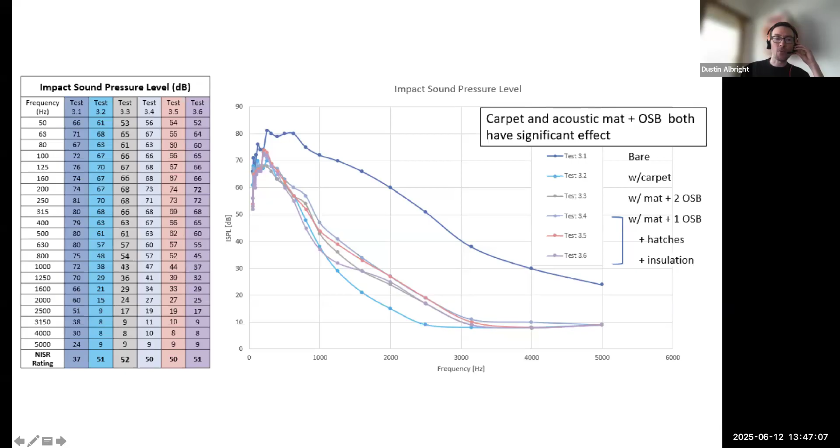Next is just a summary showing that really every one of the assemblies, including the bare assembly, met or exceeded our target rating of 45 for airborne sound transmission. And all of the assemblies except for the bare assembly exceeded our target rating of 45 when it came to impact sound.

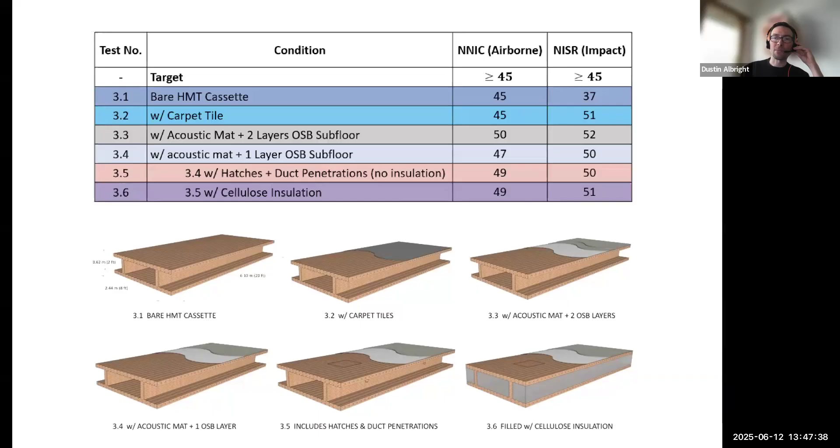Okay, so one variation we've looked at across the whole project is a variant of the HMT cassette that includes a shortened or truncated bottom flange. We've been working with an industry advisory panel throughout the course of this project - contractors, MEP specialists, architects, engineers, fire code specialists, et cetera. Through conversations with them, as well as other presentations we've given, we've learned that while the top-down hatch application is great, there may still be some desire to have bottom-up access, more conventional access, for installing and maintaining the MEP systems.

So what would that look like if there was just this cavity space in between the panels? That's what we're showing here. We've done some testing on this acoustically, and you can see that in the bottom sketch, which shows the access hatches and the potential locations of ductwork and other systems. Shown in orange on the bottom sketch is just a lay-in acoustical ceiling tile. So we mocked that up in our test chamber.

And here you see the results. The bare assembly with the truncated flange and the ceiling tiles covering over the resulting opening in the ceiling yielded an airborne sound rating of 41 and an impact sound rating of 37. As soon as you add carpet, it doesn't really affect the airborne rating much, just because carpet doesn't add much mass, but it affects the impact rating quite a bit - it jumped up to 49. Airborne is still at 42, which is below what we would like to achieve per the building code.

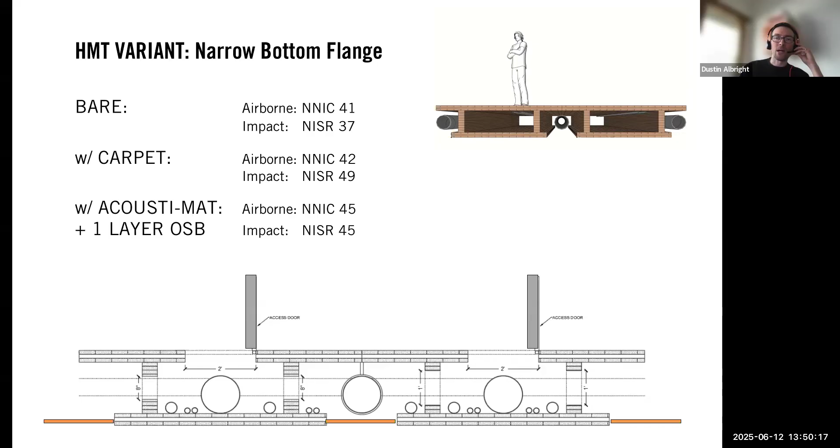The worst case scenario would be if the guy in the sketch on the upper right-hand side were standing right above that central void and walking around making noise - that would be the worst case. And the sound transmission through that void, even with the ceiling tile, probably would exceed what you'd want for the most stringent use cases. So more to be determined on that.

Just some resources for you if you're interested when it comes to mass timber and acoustics. Woodworks has just begun, a couple of months ago, this very detailed database that you can register for. It's free to register and gain access.

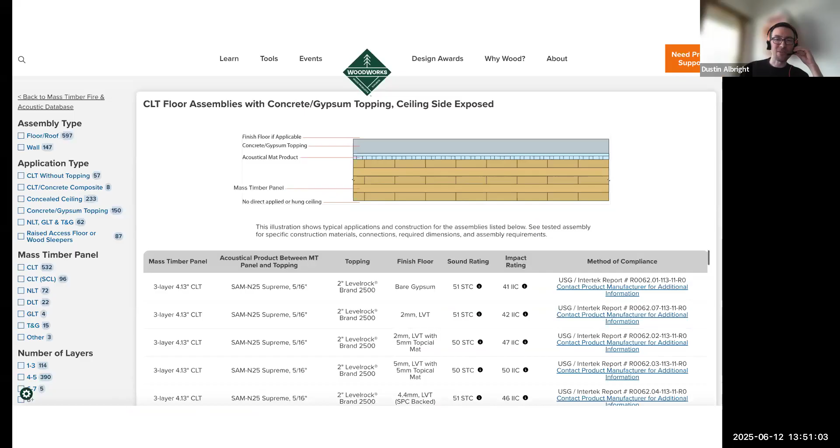This is for fire rated assemblies as well as acoustic rated assemblies. If you go into that, you can see it's a whole range of tested assemblies. It gives the overall ratings for airborne and impact sound attenuation, and shows all the different products in those assemblies. This is akin to a UL manual for fire tested assemblies that you're familiar with, but this is for acoustics. It's a really great resource.

One of the things that's still a challenge in the industry right now, something to be understood and overcome, is the influence of flanking sound—sound that goes up through a ceiling. You can have a very robust wall whose layers are sufficient for limiting sound transmission from one unit to the next, side by side. However, if sound is able to get into the floor system and flank over the wall, that can undermine the acoustical performance of the wall itself.

For mass timber, this is really an area that needs further study. There was a study done by Arup engineers several years ago where they looked at a bare 5-ply system over an acoustically rated demising wall. They found that the flanking sound—the sound energy moving through that panel and over the wall—was not insignificant. So they recommended that you actually create a structural joint, basically cutting the panels so two panels come together at a seam above an acoustically rated wall.

That's impractical, though. Think about it—if you had to limit your mass timber panels to just the spans.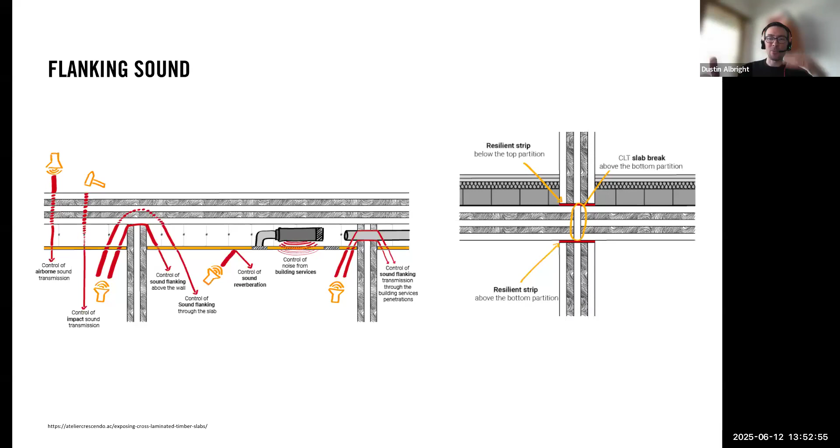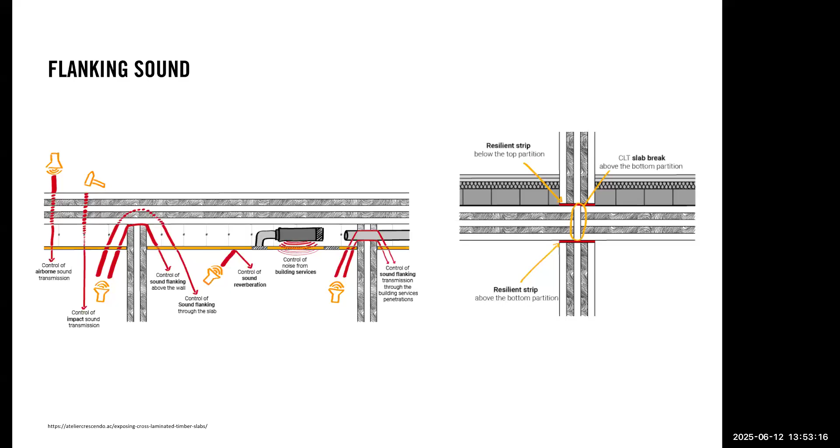Are we experiencing technical difficulties? I lost Brandon and Dustin. I'm still here, but just turned off my video. I think we probably just lost Dustin in the slides. I happen to think that was his last slide anyway. Well, maybe he'll hop back on.

He and I went through them a little earlier today, so I can mention a couple things we wanted to wrap up with. One being that we're going to release a technical guide on all the work we've done. It'll have structural, acoustic, building code, LCA, and deconstruction content all in one package, and we're hoping to release that for everyone by the end of this calendar year.

The other thing I'd say is we have this new testing ability here at Clemson to test these acoustic assemblies, and that same equipment we can take on the road. So if there's a building that you have where the owner's interested in doing some sound transmission measurements, that's something we can do. The good news is that since the federal government purchased all this equipment for us through this grant and research, we're not allowed to charge anyone for the use of that equipment or facility. There are still some costs associated with our time and mobilizing the chamber, but we have this cool new capability and we've already been on the road with it with some good success.

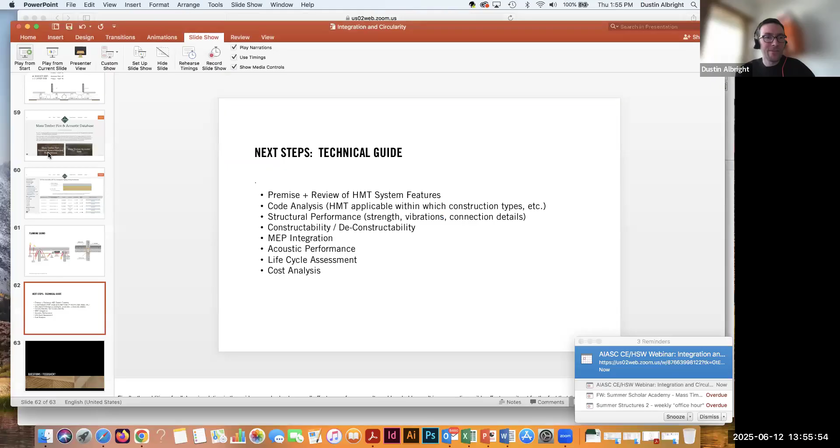Ah, see Dustin's come back. He's back, good. I told them about our facility and that we're going to have a technical guide coming out, and it was just whatever questions they might have. Yeah, so the technical guide—I'm so glad you're back because I was worried I might have to say something. Sorry about that, everyone, we just lost connection here.

Yeah, so the technical guide covers the following subjects.

We're really aiming to have this be a helpful resource for building design teams, owners, and developers as people are thinking about this system and its application, and whether it's a potential system for their projects. You can see the list of subjects here: the overall premise, review of the HMT system and features, code analysis, where this system will be applicable within the building code, which construction types, structural performance, constructability, and MEP integration strategies. We've been working with MEP engineers, thinking through some layouts with respect to our baseline reference building, acoustic performance, life cycle assessment, etc.

So one question we have for you — you all may have questions for us naturally, but we'd also love your feedback as you think it over in the couple minutes we have here, or otherwise just get in touch with us after the fact. What do you think would be particularly helpful within a technical guide like this that would answer the questions you'd have? Maybe any holes you see in the content I have here in the slide — something that would make this a useful technical guide to help you learn more and consider this system, where you'd want a longer span, where you'd want the benefits we've described.

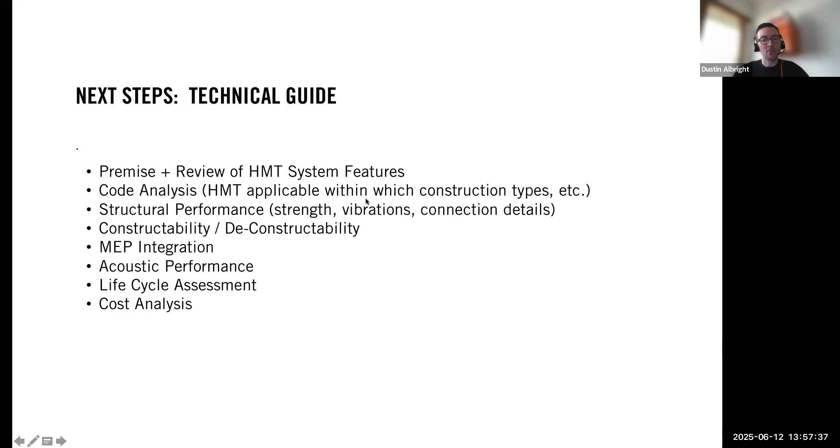So anyway, that's where we were going to leave off. Dustin, there's a couple of questions already arrived in — I can read them to you here.

Chris Bonner asks: I've heard in the past that there were sometimes, in quotes, acoustical events that happen as the building ages — maybe the general shrinkage of wood has given way to a better assembly process. I don't know if you've heard of these acoustic events or aging effects. I have not.

And did we lose Dustin again? Okay, I'll go on to the next one.

I've been in one building in SC that has mass timber elements — what percentage of all buildings use mass timber in recent years? I can't speak to the percentage, but I'm just amazed at how quickly this technology has grown. You all know we work in an industry where new technology takes a long time to adopt — it takes lots of different testing and things. To go from just a few buildings a few years ago to where we're at now is quite impressive.